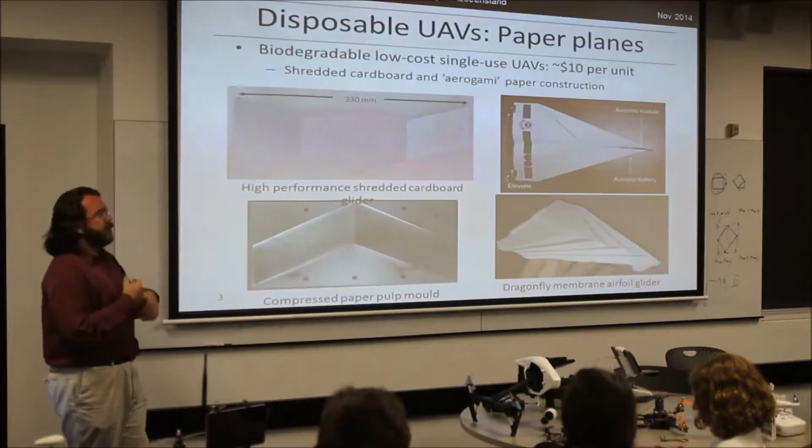If we're going to be building disposable UAVs, we're going to end up with a bunch of UAVs just discarded everywhere. Why don't we build them out of things that might be biodegradable? Why don't we build them out of things like paper? In fact, paper is a terrific material - you can all probably think of some paper-based aeronautics already. So what we want to do is find new materials, new processes for building UAVs cheaper, lighter, easier, and have them not poison the environment when we're done.

So we're trying to build them out of shredded cardboard, out of paper, out of corrugated cardboard structures, and getting complicated molds. We're now using these molds to actually use biopolymers - plastics extracted from things like starch or potatoes. Starch comes from potatoes, or things like cellulose fibers extracted from bamboo stalks and those sorts of things. So the sort of materials you wouldn't normally think would go into cutting-edge aerospace technology, but in fact can be made cheaply and can be made biodegradable.

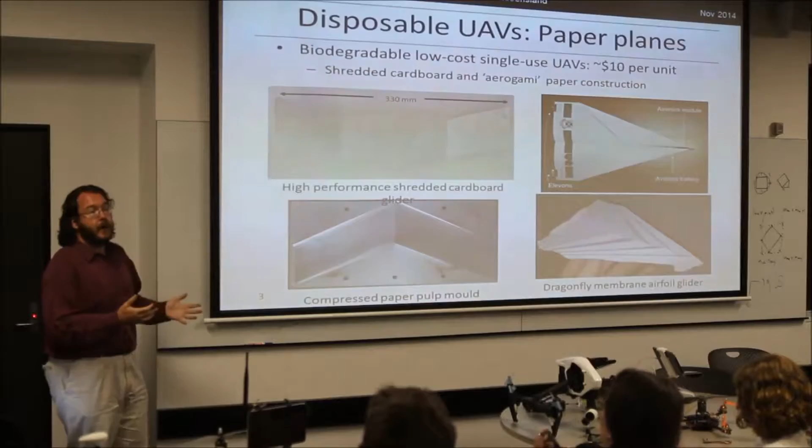With that in mind, now I've got a paper aircraft - how are we going to build the flight control on it? So one of the things we're trying to do is construct flight control systems entirely on a substrate of cellulose or on starch. These are just some examples of work where we've had substrate.

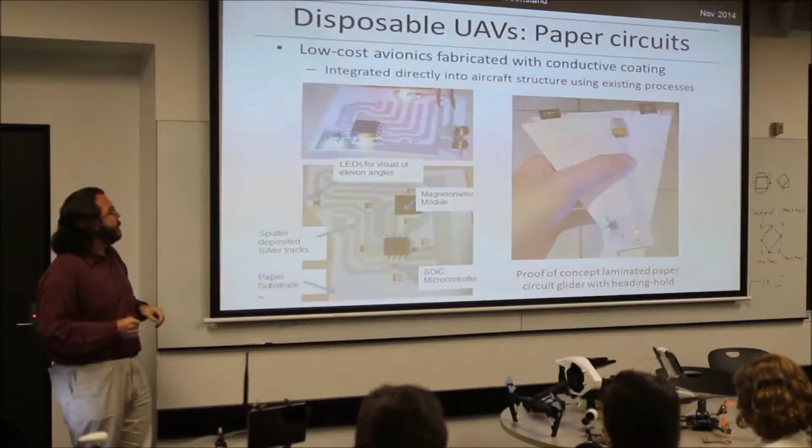Polyimide is the same stuff they make Kapton tape out of. You guys heard of Kapton tape? AKA God's tape? It's the stuff they just wrapped the lunar lander in. It's terrific - they made it for the space program.

We're making paper aeroplanes out of it. Oh well, seems reasonable. So the idea behind this is not that this is a particularly terrific aircraft, but rather to show that you can make complicated 3D objects out of a flat surface, which is already perfect for making circuits on, because that's what it was originally designed for.

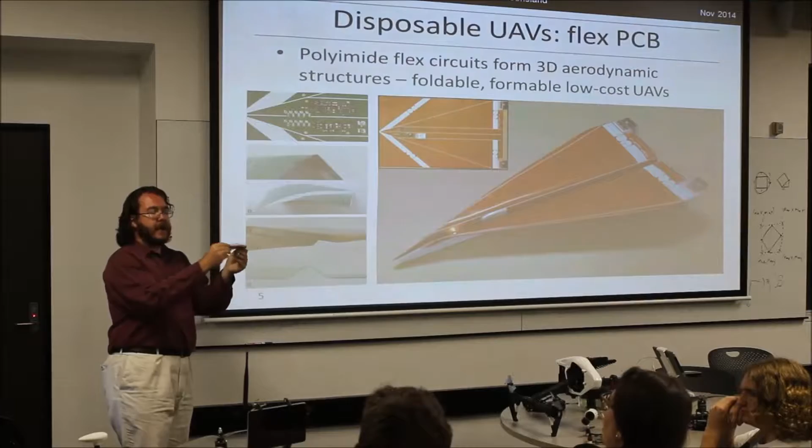And so all the flight controllers are built into the same structure as the aircraft itself. We put the voice coil actuators on, and we can show that this will actually keep its wings level and control its angle of descent. This is a terrible aircraft, by the way - we just made it this way so that people could see flight chip becomes aeroplane.

We're now working on the next generation of this, which will have much better gliding characteristics, and we'll be able to produce them for dollars a piece. In fact, the biggest expense will be the IMU itself doing the flight control, and we'll be able to use them for all sorts of interesting missions.

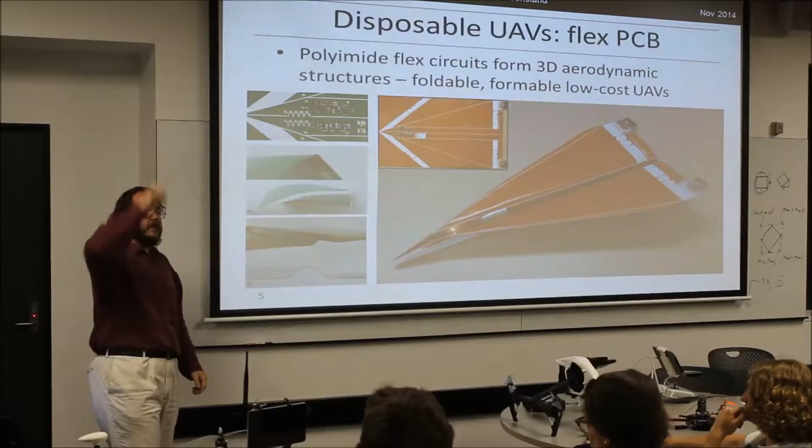Our long-term objective is to build a $10 UAV that we can put into a hot air balloon or helium balloon, send up to very high altitude, and have it glide efficiently. We think if we can send one up to 30 kilometers using a helium balloon, and have a glide slope of, say, 40 to 1, which is achievable but difficult, that's 30 times 40 divided by 1... 1,200?

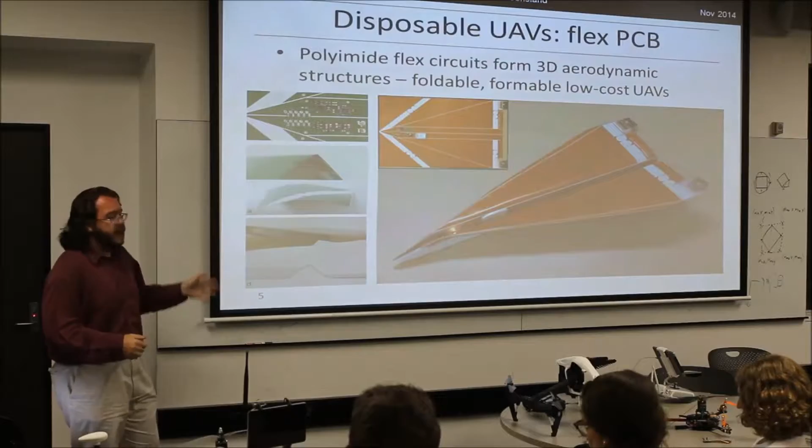What's 1,200 kilometers away from here? How about Sydney? What if we could send a single UAV for $10 from Sydney to Brisbane? That would be amazing. We've also got a whole bunch of other things we can do. We can put bends and folds into the structure of the aircraft to make it stronger, and curves in it to get cambered airfoils - a whole bunch of things we can explore to make very capable aircraft out of very cheap materials.

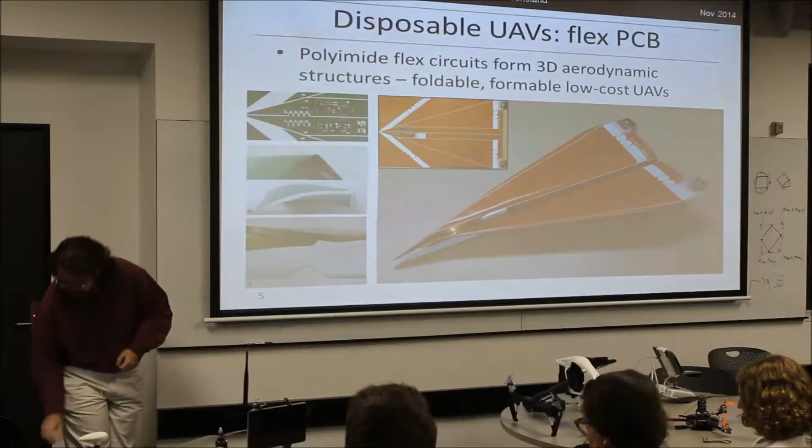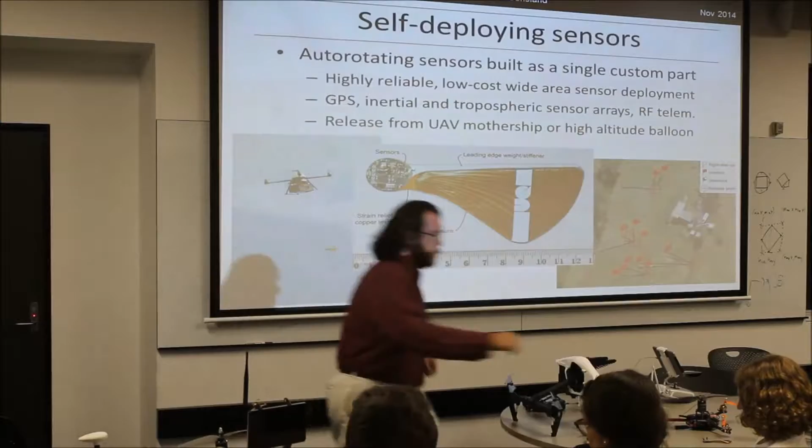We're also looking at self-deploying sensors, which is sort of the flip side. Rather than making a whole aircraft out of cheap materials, why don't we build something which is notionally not an aircraft, but gives us capabilities associated with the aircraft. So this happy little fellow here is a sensor module. On board it has temperature, pressure, and humidity sensors that will give you atmospheric and tropospheric information that might be difficult to get otherwise.

A classic example of this would be something like a bushfire. If you could make these for $100 a piece, rather than having a single $100,000 UAV, why don't you simply have 1,000 $100 UAVs? Or if you can make them in sufficient quantities, 10,000 $10 UAVs. Just blanket these across an area, throw them from the back of a larger carrier aircraft - even just a Cessna would do - have them spiral down and soft land all over the place. Then you can have a real-time, up-to-date map of which bits are hot and dry, which are cold and damp, which are likely to have a bushfire come through, and which you don't have to worry about so much. So a very different perspective on UAVs.

The trick to this is, of course, the integrated wing is just part of the same circuit board you'd have to fabricate anyway to make a sensor module - much, much cheaper than having 10,000 parachutes you have to pack by hand to make them soft land.

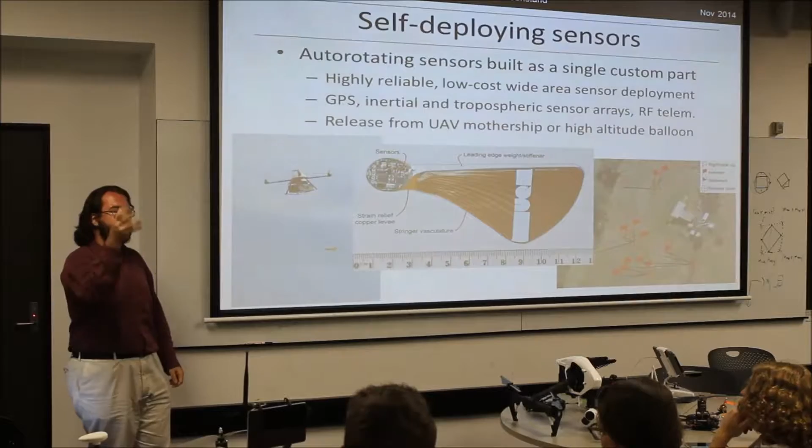We've done some experiments with CSIRO where we got an off-the-shelf quadrotor and put a vending machine on the bottom. You've got the same spiral descent. When it reaches the coordinate, it uses the same function the software would normally use to take a picture with a camera - instead, it activates the vending machine, and out pops one of our modules. They've been incredibly reliable in practice. So yeah, really cheap system, really simple idea, but we can actually use this to solve real problems.

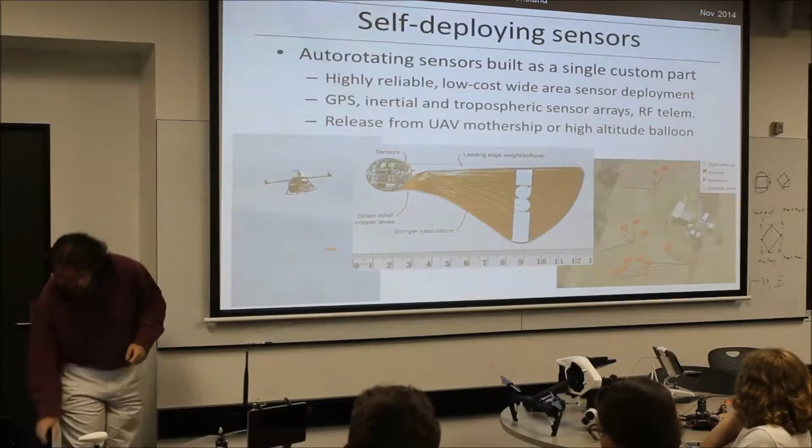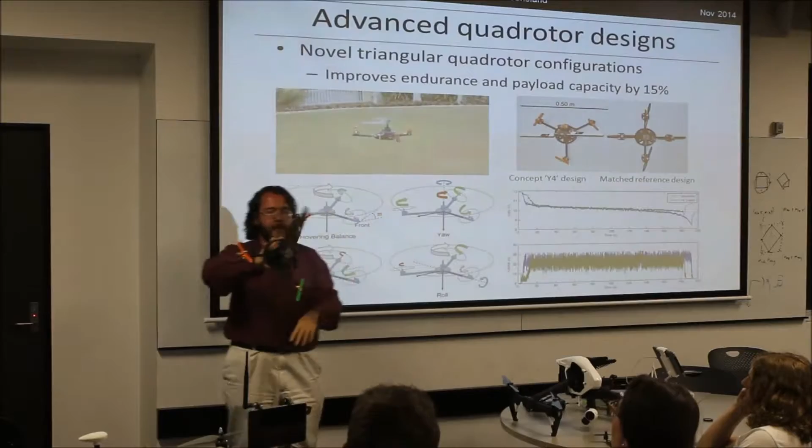Other work we do is advanced quadrotor design. I've got this one here - it may not look it, but it's actually a quadrotor. It's got 4 rotors, one big one and 3 little ones. The reason for that is really simple: the smaller the rotor is, the harder it has to work to get the same amount of air flowing through it to provide the same thrust as a larger rotor.

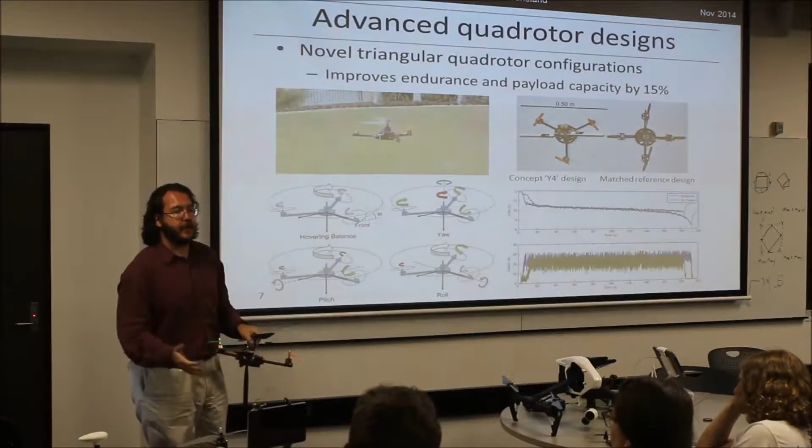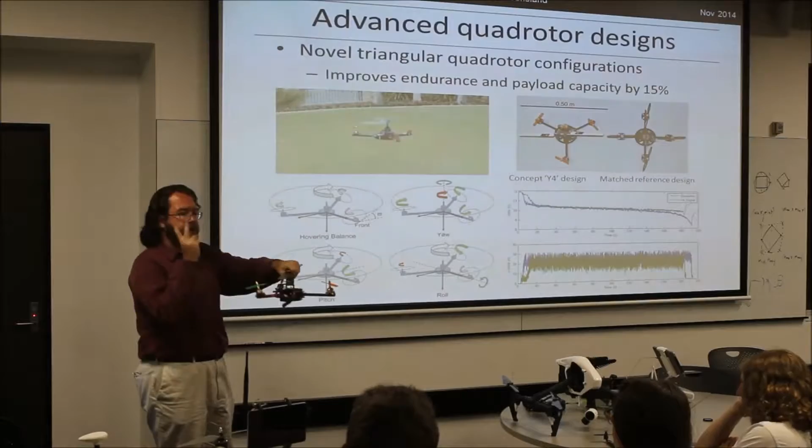With a quadrotor, you've got 4 rotors all the same size, but they're all fairly small, meaning you're screaming along very fast trying to lift the weight of your aircraft. What if instead we could maximize the size of that rotor by making a big circle that inscribes the vehicle itself, the entire lifting area? So here, one big rotor, and the 3 little ones do 2 jobs - canted slightly to the side so they provide the side force a tail rotor would normally provide on a conventional helicopter, but they also act as the 3 legs of the stool to give us maneuvering control. The neat thing is these small rotors speed up and slow down very quickly, so your dynamic control for this type of aircraft can be very, very fast.

There is a problem, of course. If you've got one big rotor and 3 little ones, nothing's balancing out the gyroscopic forces that occur from this one big rotor. So what do you do? If this is perfectly rigid, it'll actually vibrate and precess, and it's impossible to fly.

I know, I've tried, and crashed. I'm not a great pilot.

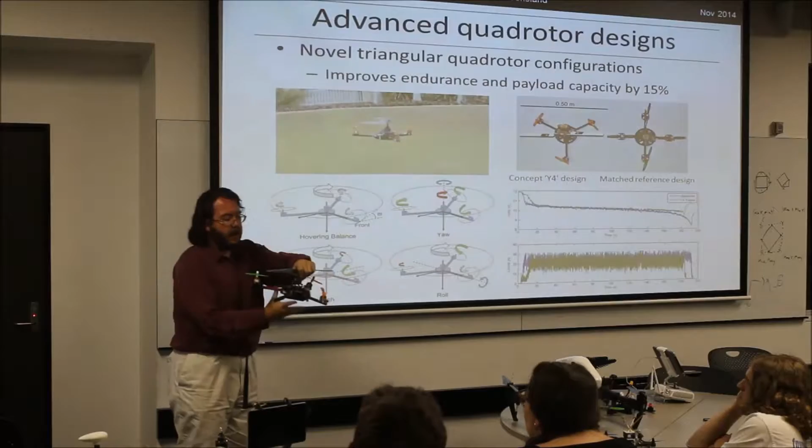What if instead we simply put a pivot there and let this one do what it wants, so it can precess around, vibrate all at once, and hey look, the airframe can stay nice and still. That means when you decouple the motion of the rotor from the aircraft itself, and these things speed up and slow down very quickly, they can keep the structure of the airframe perfectly level, and the airframe just doesn't even see those forces being transmitted.

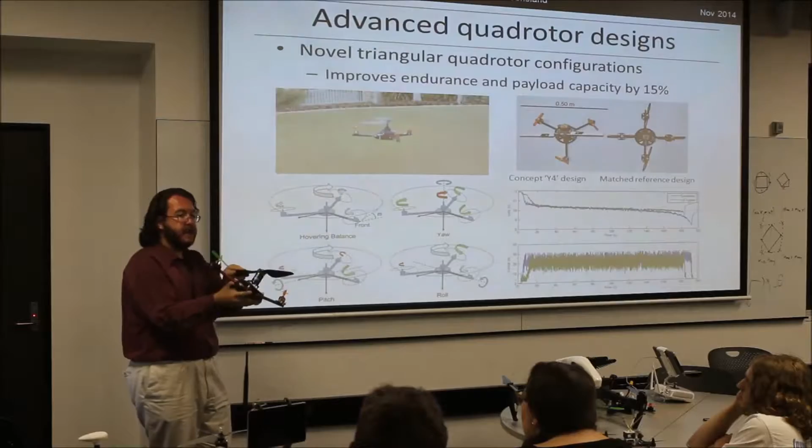To maneuver, you speed one side up. In fact, coupling between the pitch of the blades and the direction of the mast is what allows you to fly through the air and translate.

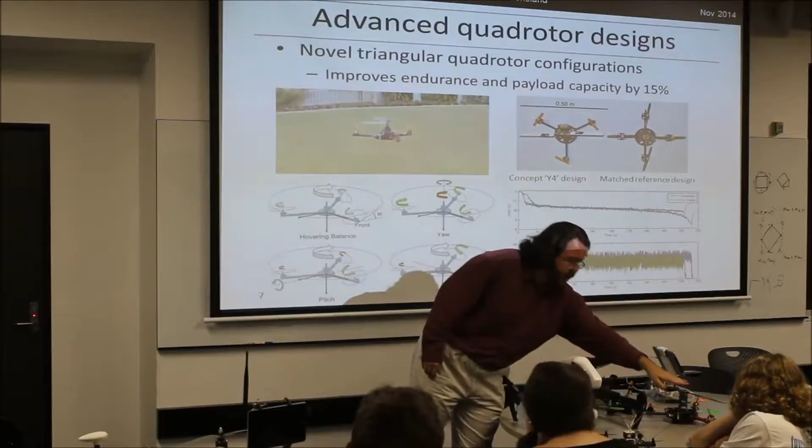So we have a patent on this one. We've licensed it to VTOL, a local Brisbane company working in UAVs. They're building the bigger, scarier brother of that one, which is about that big across. Carries 2 kilos, flies for 40 minutes. Given that every other aircraft they have in that size flies for 20 minutes, it shows you what a massive improvement you can get just by thinking differently about how you design the structure of the aircraft.

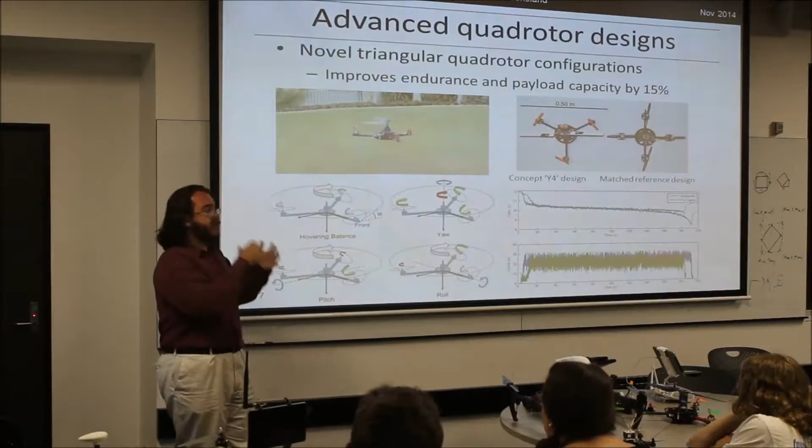So aircraft-object interaction, this is something I did back when I did my postdoc at Yale, but we're continuing to work on it, except our photos from here are not nearly as cool. I have some video of this later on if you want to see it.

Back in the halcyon days of 2009, the opinion of drone people, and still to an extent today, is that interaction with objects equals bad. There's very few opportunities, short of taking off and landing, where the aircraft is not going to go horribly, horribly wrong every time it touches something.

What if it didn't have to be that way? What if we could find a way to make these aircraft be able to touch something and not have a pathological response because of the forces being added to the airframe? Of course, those IMUs inside, which are doing all your dynamic control, are working under the assumption that you're not actually coupled to anything. If they don't know the forces you're putting into it, they don't know how to respond correctly. What if instead we could use some sort of intelligent fabrication approach, some sort of structural design that will allow that to just be buffered a little bit?

So what we've done is we've put in elasticity, what's called compliance, into all the linkages inside our little gripper, so that when we touch an object, we can move and be flexible a little bit. Now, when we do the dynamic analysis of the vehicle, we can actually show that we can be stable with certain conditions under the same flight control that we use in free air.

Now, that probably doesn't mean anything to you, but think about this. If you're designing a flight controller to work in free air, and it works when you're coupled, you don't need to know if you're coupled or not. The same flight controller will still keep you level and keep you working, even while you're contacting an object. And you don't have to know whether it's occurred or not.

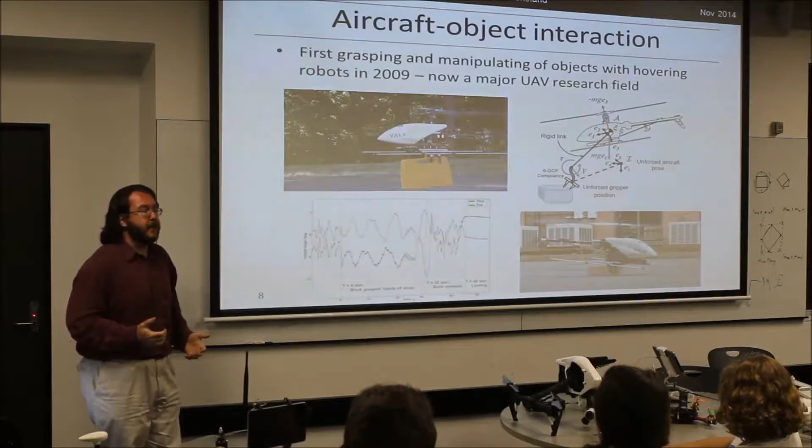So if you come down and you mash your gripper or your probe against the object you're trying to pick up, it doesn't matter, you're still stable, you're still good. With this, we were able to achieve the world's first outdoor grasp and retrieval of an unstructured object back in 2009. Since this time, the field has just exploded in aero manipulation. It's now a very hot topic in aircraft robotics and robotic research. So if you're interested in this kind of thing, now is the time to get involved.

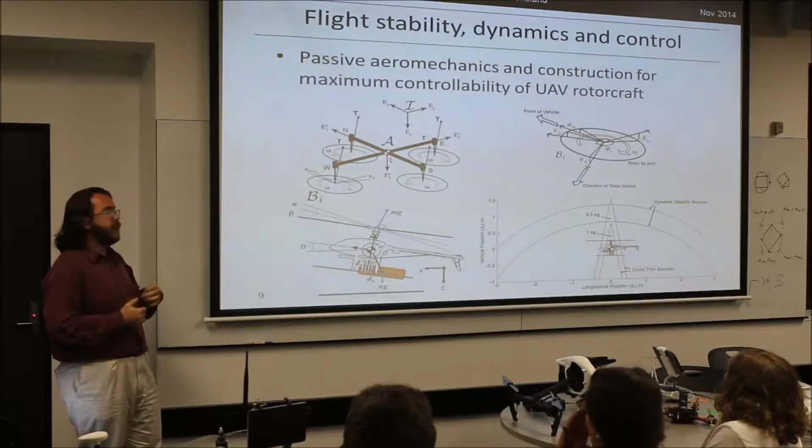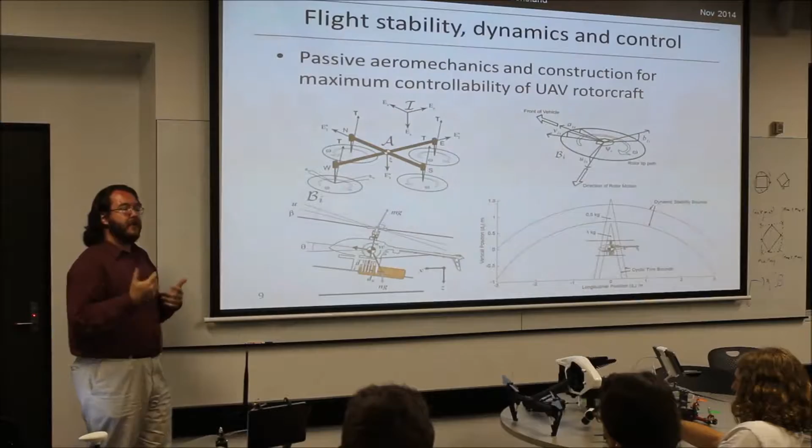Some boring math. One of the other things we do is look at aeromechanics, dynamics and control, how aircraft stability changes as you move payloads around inside the aircraft, coming up with stability boundary constraints and rotor flapping mechanics applied to multi-rotor vehicles. It's a bit on the arcane, theoretical side of things, but if you're really interested in making an aircraft that will work better than the next guy's, this is the sort of stuff you need to do. It's the fundamental mathematical nuts and bolts rather than the physical nuts and bolts that allow these systems to fly.

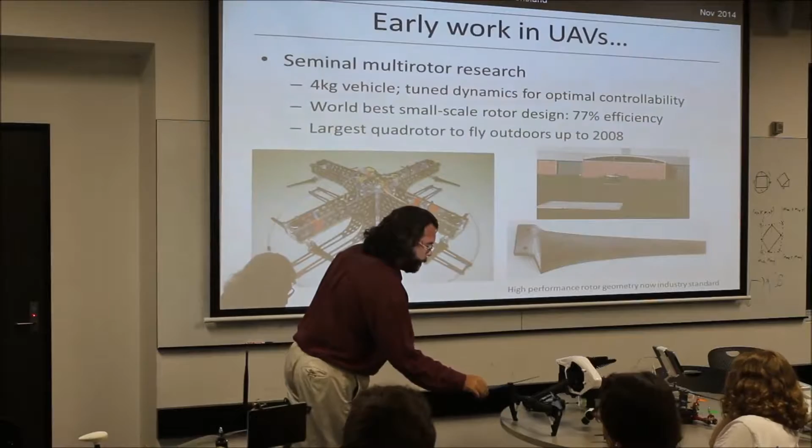Just to give myself a plug, I really love the rotors that they put on the DJI Inspires, because I recognize them from back in 2008. These are the most efficient rotor blades ever designed for a multi-rotor. They were 77% efficient. The theoretical maximum that can ever be achieved is 81% efficient. You can get up to 80% in a manned helicopter if you spend a lot of money getting it right. No one else has ever beaten those.

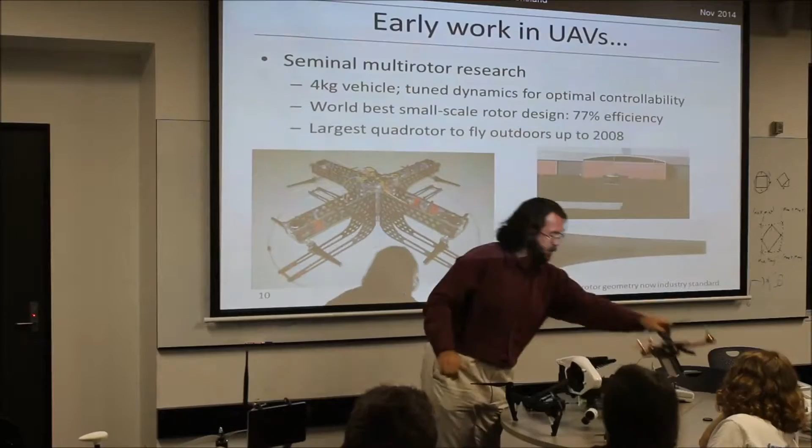This was my 4-kilo baby, the ANU X-4 Flyer. I put it up because nowadays we buy a Pixhawk off the shelf - we use one under here because it's quick and easy, it's got a landing pad. I shouldn't do that with a flight computer... that worked. This was all built, everything by hand.

We got solid state IMU components. So way back, the very original gyroscopes that you had to solder onto the board by hand, assembled onto a machined aluminium block to keep everything square.

Our electronic speed controllers were hand assembled, and in fact we had braking back then. We had 400 hertz control and kilohertz motor control before all the cool kids were doing it.

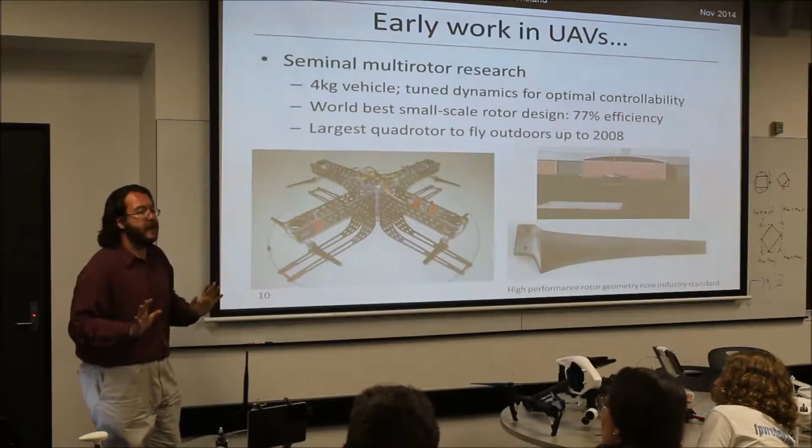We used brushless motors, but they're in-runners, not outrunners, because outrunners didn't exist yet. Back in the day, everything was hard and everything was crap. And we were terrified of it because the rotors wanted a third of the speed of sound.

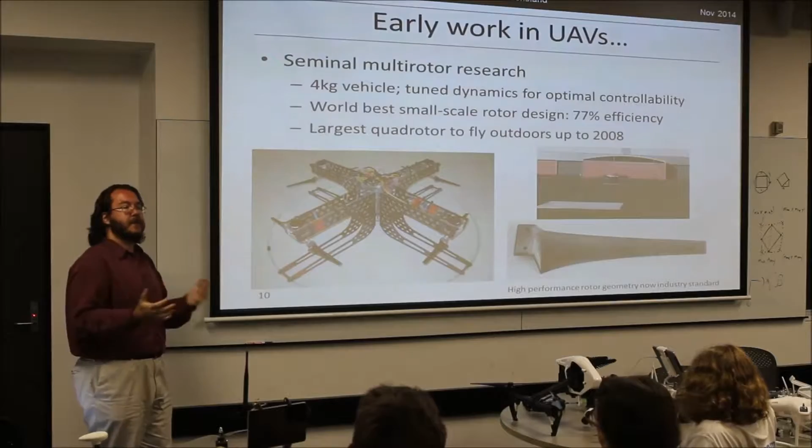Modern UAVs are so much nicer because you don't have to build all that stuff yourself. But the cool thing is, if you're interested in the technology that goes into these sorts of things, this is the sort of stuff we still do today to try and improve the performance of platforms. We no longer have to do it all ourselves if we buy parts off the shelf, but by choosing where you put your energy into developing a vehicle, you can get much better results than if you just rely on what the hobby guys do.

We do other stuff within the robotics lab. We do stuff for kids with vision impairment, sporting aids. We do planning under uncertainty and mechanics of motion, and robot soccer apparently - but I won't talk about that.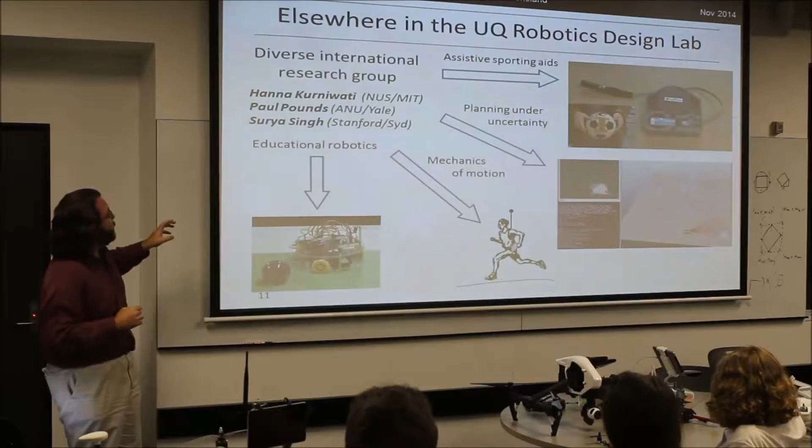What I'll do is fire up my other window and we'll have a chat about aircraft design. This is my spreadsheet of doom. I've spent more time looking at this spreadsheet than I think I've spent looking at my spouse. Why do we care? Why do we do the numbers, right?

Who here builds their own UAVs? Yeah, a couple, show of hands? How well do yours work? Do you get everything out of your design? Most of the time. How long does it take to get there? Depends - generally I follow other people's things, so they spend ages, they've spent the time. How long did they spend doing it? A decent amount of time, hours and hours and hours probably. And even then, there's still ways you can tweak it and get it better.

If you were to design an aircraft that would fly for 10 minutes and it's cheap to put together, you can just buy a kit today and it's done. If you want to build something that's going to fly for longer, better, and cheaper, and more reliably, you actually need to think through every subsystem, every step of the design. And how you design a drone is actually not a straightforward thing.

You're really designing an entire aircraft all at once. And it's not just an entire aircraft - there's no degree you get in entire aircraft design. You need to be a master of aerodynamics, mechanics, electronics, computer design, software development, control theory - a broad spectrum of skills.

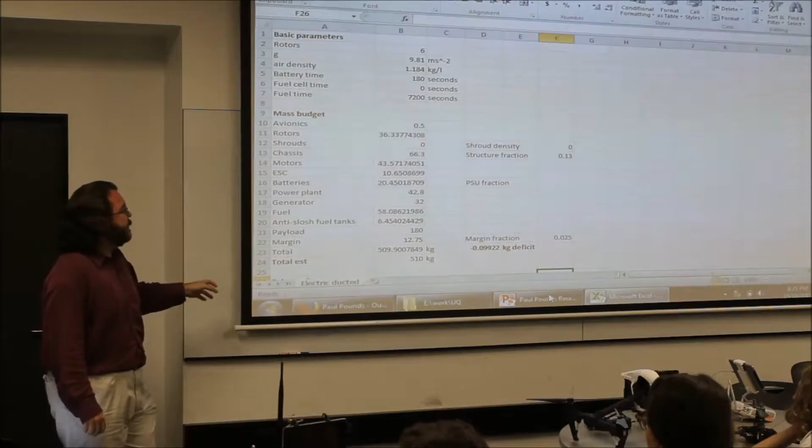Anything left over is called deficit. So here I'll put in bold, minus 0.099 deficit. What that means is there's about 100 grams worth of material unaccounted for in a 510 kilo aircraft. If we can't find something to put that deficit towards, we'll just add it to margin, because margin doesn't weigh anything. We just assume that we'll consume it.

If that aircraft ends up being slightly underweight than what we designed, hey, that's cool, we can put more fuel in. What you don't want is for this to be a positive value. If that's a positive value, it means you've got to put more stuff into the aircraft to make an aircraft of a certain mass fly than you have mass. And that's just not going to work.

So a good question is, where do these numbers come from? Some of these you know, some of them you specify. The weight of the payload, I'm just saying yep, 2 people, 90 kilos each, that's it, it's stipulated. Other things like power plants, you go out and look at how much you need, how much you think you're going to have to put up with, and you size that piece of equipment to fit it.

Likewise with batteries, likewise with ESCs. It seems odd that we wouldn't just pick an off-the-shelf ESC. But when you go up to an aircraft of this size, the ESCs you get, you're no longer really constrained by what's available on the market because you need to build them yourself anyway. Yes, you can go out and buy industrial ESCs that will spin a 90 kilowatt power system, except they're going to be industrial and huge. You're actually going to have to re-engineer something that will solve that problem. If you can't buy it off the shelf, you're doomed to do it yourself.

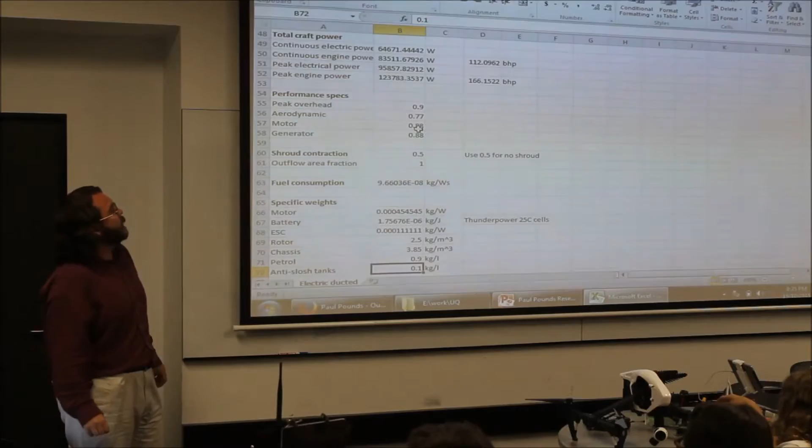So if we do all the math, we sum all of that up, here's our total craft power. For all the engines that we have to provide peak power, we're going to have something like 160 brake horsepower to drive our whole aircraft. That may not seem like a lot, it may not seem like any particular number, but when our power plant is only expected to be 42.8 kilos, that's actually tremendous.

We've had to go out and find really crazy high efficiency, high power density power systems to be able to get that kind of induced power. And that's why we don't have flying cars. But this one would work. I found parts that will make that work.

So I talked about peak overhead as being 10% just thrown away. This is where these numbers come in. Our aerodynamic losses, we're using 77% efficient rotors. Our motor's 88% efficient, our generator's 88% efficient. If we had special shrouds that would allow us to shape the flow through our rotors to be more efficient, we would compute that there.

Then we have specific fuel consumption, specific weights. If we were analytically computing how big our motor has to be to provide the amount of power throughput that we want, we can actually put these numbers in and compute systematically how big each component of the aircraft has to be. In fact, there's a whole bunch of rule of thumb numbers for this, some of which I'm allowed to give you, some of which I'm not, that you can use to spec any scale aircraft that you want, all the way from a very small aircraft up to a full-size passenger aircraft, and parametrically design your drone or aircraft. And this spreadsheet is just a subsystem of all the rest of the spreadsheets that feed into it.

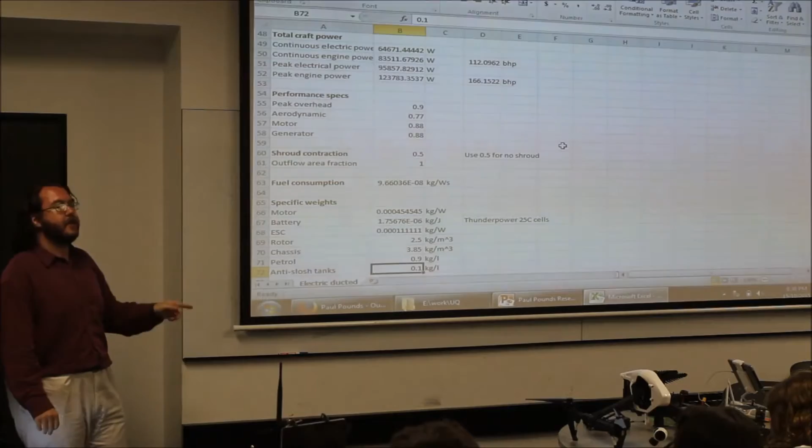Okay, things like battery. This is an interesting one. I spec here 1.75676 times 10 to the negative 6 kilograms per joule. Most people who specify battery packs for a drone will tell you it's milliamp hours. Well, it's a milliamp hour, the number of milliamps for an hour. But they don't tell you what its voltage is in that number. In fact, when you multiply seconds by voltage by amps, you get out joules.

And so the thing you really care about is joules per kilo, or in this case, its parametric inverse, kilograms per joule. If you know how many joules you need for your mission, you can calculate how many kilos of cells you're actually going to need. And the cool thing is, people publish this number. You can go out and find watt hours per kilo or kilos per watt hour from various manufacturers like Kokam, because they're used to dealing with people who build things like the F-35, where you need to know these numbers in a parametric form, so you can just plug them into your spreadsheet and design your aircraft.

The best I've ever seen are 262 watt hours per kilo, which is unreal. And I was blown away when I saw these cells, because the ones I've specced for this are using, I think, 178, and the average ones you'd get would be around 150. 262, what's the catch? Turns out you can only charge them 60 times. What would you use those for? Remember, we're talking about disposable UAVs. You put them in your cruise missile, it goes bang. So you don't have to recharge them very often.

Okay, so, hey look, where have we started from? We started from specific parameters to characterize our aircraft. We've started from fundamental laws of physics, stuff like gravity and the number of rotors. And from that we can compute analytically all the subsystems, and we show that we get out a total that's less than our actual requirement.

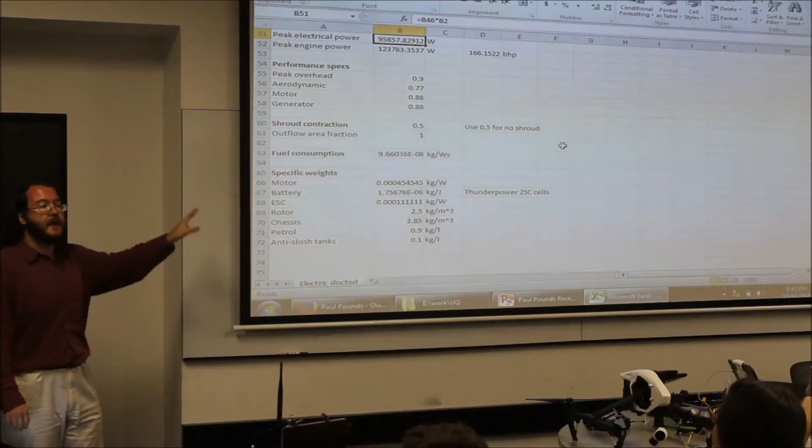So yeah, anyway, that's the other side of the coin. I probably bored you all to tears, but I'm happy to take any questions you've got about this, about research stuff, or just UQRobotics in general.

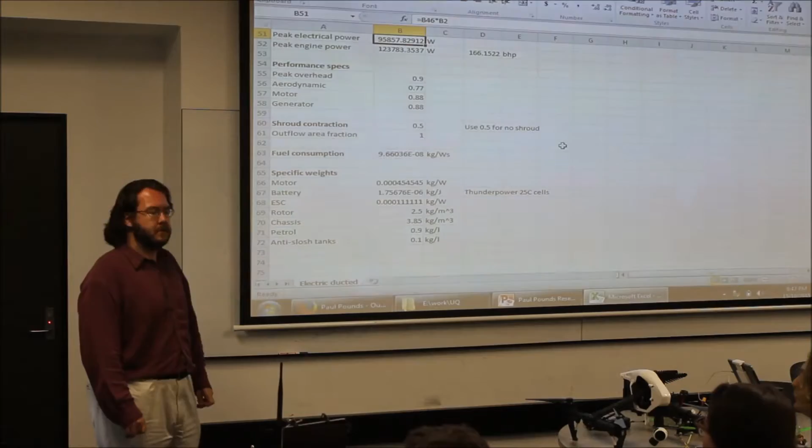What kind of material advances would be most useful for improving UAVs or light aerial vehicle design? It's obviously already using carbon fiber parts and there's lighter, more energy dense batteries and so on, but what else is there? There's three things.

The obvious one is, of course, LiPo cells. Get us better batteries, get us pocket fusion reactors like Back to the Future, and this will be doable, right?

There's mechanical structures, so removing parasitic weight. Parasitic weight is anything that doesn't keep the aircraft in the air. That includes things like the fuselage - it doesn't make it fly, it just keeps the flying bits together. Things like anti-slosh fuel tanks don't make it fly, they just keep the fuel that makes it fly from spilling out everywhere. If you can thin down those margins increasingly accurately without it failing, you'll have a strategic advantage in designing a better aircraft.

But the one that people forget is actually the electrodynamics of Lorentz force actuators - still very much a black art. Tesla was such a god because he could see all of the field windings in his head and just make something that worked. Today, we're not interested in just making it work.

We actually need things to be super efficient. One of the fascinating problems is that as you push these motors harder and harder, they don't stop working, they just get hot - because of parasitics inside the motor design itself. If you can break down all of the eddy currents, all of the back EMF effects, all of the places where power is being diverted from motive power into thermal power, you'll actually be able to get something like 10, 20, 15, 50% more energy depending on how your system is set up than if you had designed it in a slipshod way. So electrodynamic performance, better conductors, just wiring.

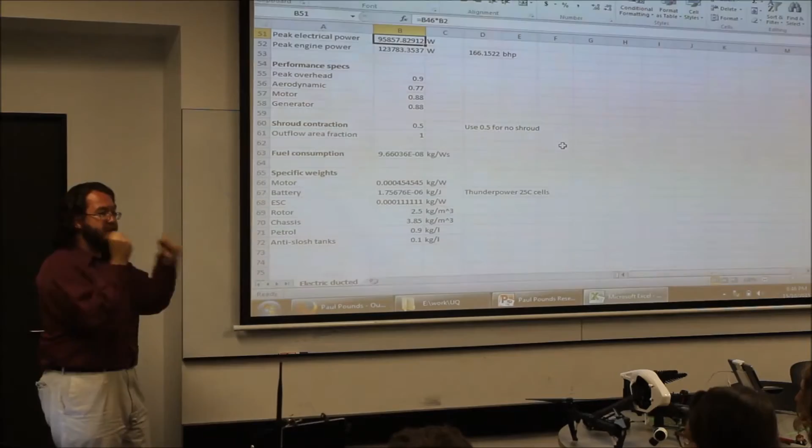So being able to get that extra couple of percent normally isn't worth it for people, unless they're crazy and love it to pieces and say no, 70% is not good enough. To give you a sense of scale, most props you use will be something like 60%. I don't think any of us are...

These are probably the most efficient propellers you've ever seen. These are really small, so the smaller you are, the less critical your geometry is, because everything starts to look like a flat plate. At low Reynolds numbers—this will be probably around 70,000 to 80,000 depending on how fast it spins—a flat sheet is actually a really good approximation for good airflow. As you get up to high-speed jet flows, with millions and millions of Reynolds numbers, it really matters to get your profiles right, because the air is then dominated by inertial effects rather than viscous effects.

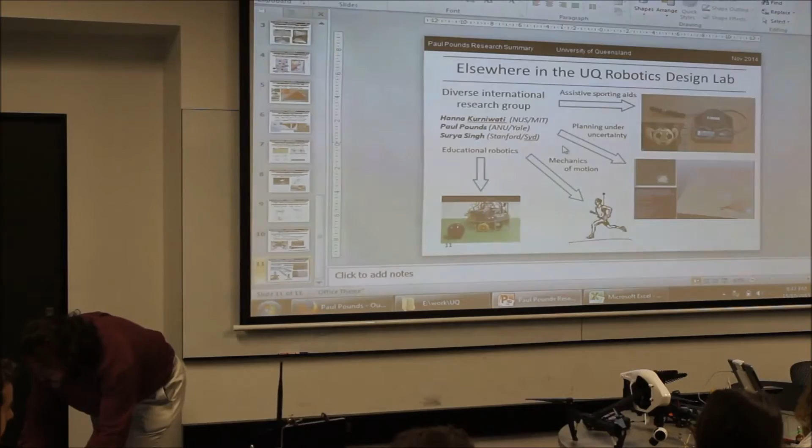Part of the reason I'm hard on these ones, aside from being based on my PhD research, is that the airfoils in here are very specially designed. When I designed mine—let me bring up a picture—it goes at a third the speed of sound. Very fast, because this chord tip is so narrow, it's 12 millimeters across. To get efficient aerodynamic flows, we've got to be screaming the air across it to make it behave like a much larger aerodynamic structure. That's great, it lets us get a lot of lift out of it.

But what's really bizarre is because we're getting a lot of lift out of such a thin profile—these things are probably less than a millimeter thick through most of it, and at the tip they were 0.2 of a millimeter thick, paper thin—and we were lifting 4 kilos of robot on it. So as we loaded the leading edge of these airfoils, it would actually twist, and the whole thing would twist until it stalled. To fix that, we designed a very special profile: snub-nosed, thick-bodied, but very long and high aspect ratio.

What that does is a couple of things. By being thick-bodied, it stops it from having just a flat, twisting surface like this one—here I can just twist it like that. If I add more mass further away from the center axis, it becomes harder to twist. By rounding the nose, it makes it less susceptible to stall. With a sharp leading edge like that, the moment you have any deflection, the flow will just separate and go off, and you won't get any lift—you'll stall.

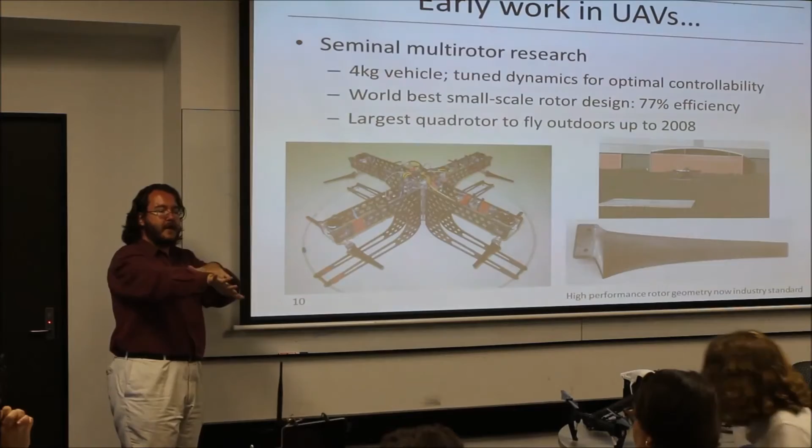Combining those features together while keeping a fairly slender profile makes it resistant to forces causing it to go off axis, but it doesn't solve the problem entirely. What we did is actually design it through an iterative aerodynamic aeroelastic simulator. We'd set the angle of attack lower, so the inboard part of the rotor would start to twist up, which would cause the next part to twist up, and finally the tip to twist up into the most efficient angle of attack of those blades.

So under hover thrust, they become very efficient, because all of those elastic distortions are accounted for in the static resting design. We did a whole bunch of analysis to get the carbon fiber material perfectly tuned so that everything twisted in the right way. It's actually a feedback control loop: if you spin faster than the design hover speed, it twists harder, causing more drag, which causes it to slow back down.

If you spin slower, it'll not come up to the right angle of attack, it'll produce less drag, and it'll actually speed up. So we can move around this very accurate hover velocity that we've designed into the structure of the rotor itself in order to make it super efficient.

It's bizarre because this aircraft was designed with a 50 hertz gross control loop and a 400 hertz motor control loop. We didn't need the motor control loop at all—the structural design of the rotors did it for us. And because we had such crappy control, it still worked really well, because the rotors were just governors. As they moved up and down within their own flow, they would dynamically interact with changing flow conditions through the rotor to provide passive damping. This helicopter actually flies better than pretty much any other aircraft in its era, simply because the passive structure of the aircraft makes it more stable.

The best competitor we had had similar performance to us, but they had a gigahertz core running through an FPGA, driving little rotors very fast. They were able to get half a degree plus or minus. We were half a degree plus or minus on a 50 hertz controller. That's the difference thinking carefully about the structure of your rotor makes when designing an aircraft. So yeah, I really like these ones.

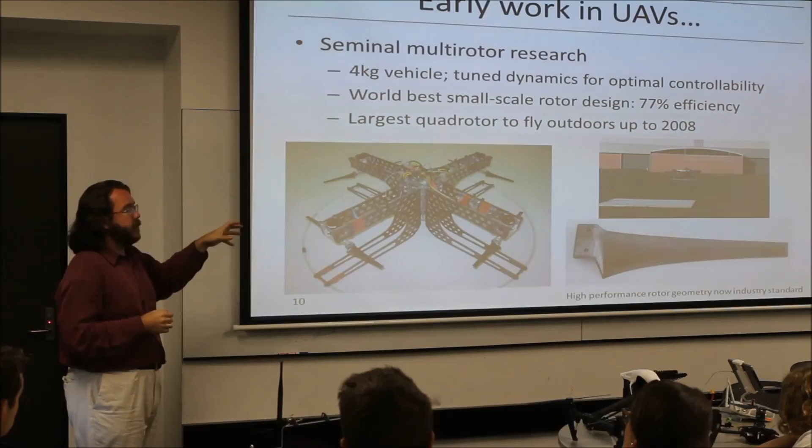That said, we still put lots and lots of vibration damping on all parts of the aircraft. Out here on the motor carriages, they're isolated by little rubber grommets you can't really see. Internally, this is actually suspended on a tetrahedron of rubber isolations, because you couldn't just buy this rubbery, gummy vibe tape stuff you can get now. Nobody had the little 8-ball suspension things—it didn't exist. So we made it out of baling wire and glue. In fact, the vibration system we used was originally for turbo machinery, because it was all we could get that was tuned to the right vibration frequency for our system.

But yeah, very small perturbations. In fact, I just realized the pizza was here, so I'll get out of the way.